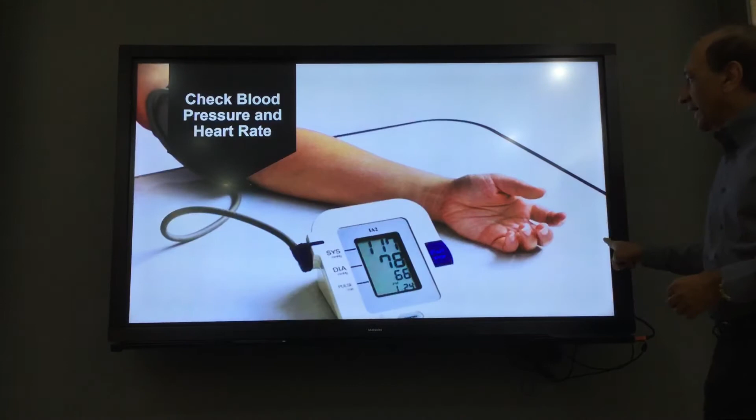So same thing is with structures. Structures also have a heartbeat. And if we know how to look at that heartbeat, and we know what is a good heartbeat and how to manage that, then we can understand the dynamics of the structures and also the behavior of the structure. So heartbeat and blood pressure, both are very important.

When you run, you're always tracking over time how your heart is performing, like a time history of your heart performance. So all of that is actually very relevant to structures also. Last time we started the discussion with the tiger. Today we are starting the discussion with the doctors.

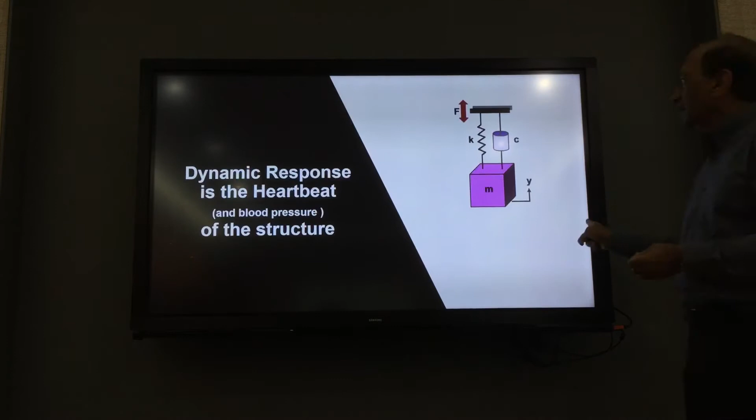But what I'm saying in that video is what we are discussing today - that means the dynamic response of the structures, which is the heartbeat of the structure, especially for earthquake and wind response that we've been talking about so far. So you already know what the system is, you've studied this, right? Okay.

These equations, everybody knows - Newton's second law. Newton already knew that force, mass, and acceleration are related. If there's an acceleration and a mass, there's going to be force. But Newton's assumption is that the body is rigid and has no damping, it cannot deform. But in our case, we are talking about structures.

Structures also deform, and they also have energy dissipation. They dissipate energy when you try to change their state. So those two components are missing in Newton's equation.

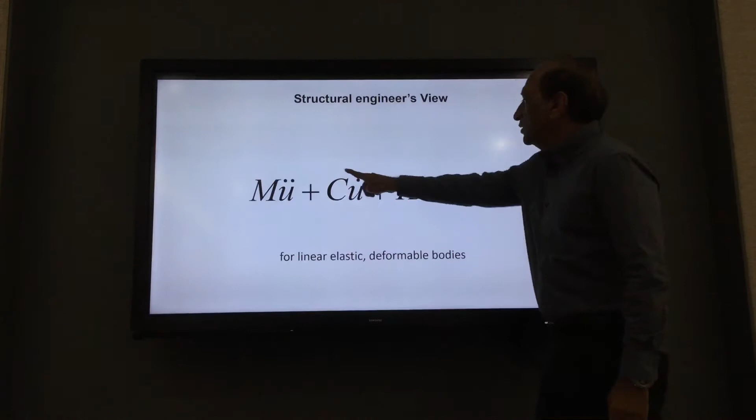Structural engineer's view is this: there are three components to the force you want to apply. One part is taken up by stiffness and displacement, one part by velocity and damping, and one part by acceleration and mass - that's Newton's part. These two additional parts handle deformable bodies that also dissipate or absorb energy.

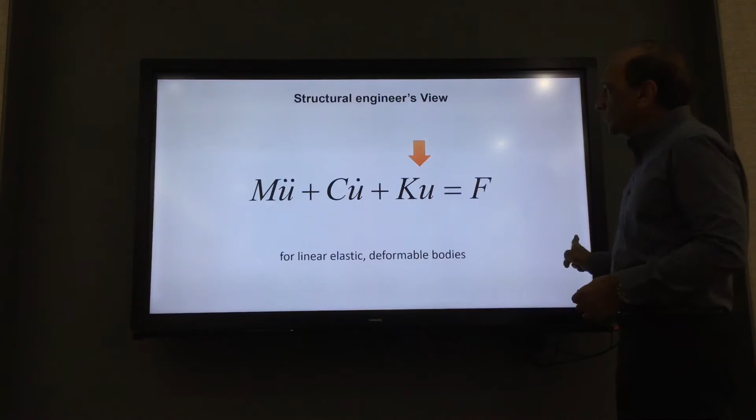But this is still for linear elastic deformable bodies. It is still not a real structure, because real structures are more than this. We are missing one more term we'll talk about. We discussed this a little in the last course, and I want to connect today's discussion to it - this is the stiffness part, and last time we talked a lot about stiffness.

You've seen this one, right? Last time we showed that dynamic response is a sum of the response from the modal response. We talked about the importance of modes already, so we know that.

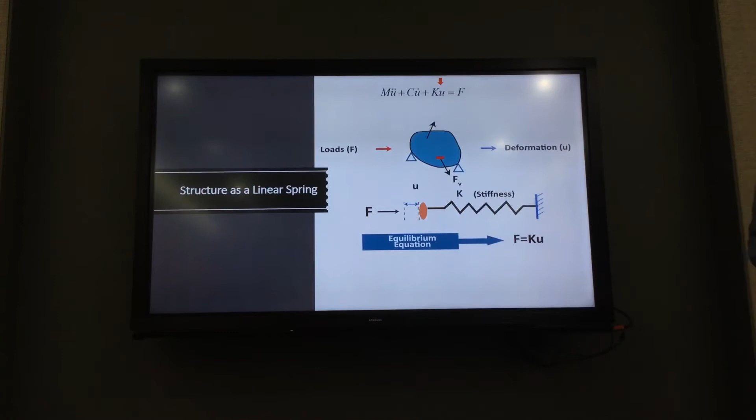We already talked about this equation too: we can consider the structure to be a big spring, so stiffness is here. For static structures, we only have this equation. For Newton, we have mass and acceleration equal to force. For our structures, if we ignore dynamics, the equation becomes simple like that. But when we have dynamics, we have the full equation.

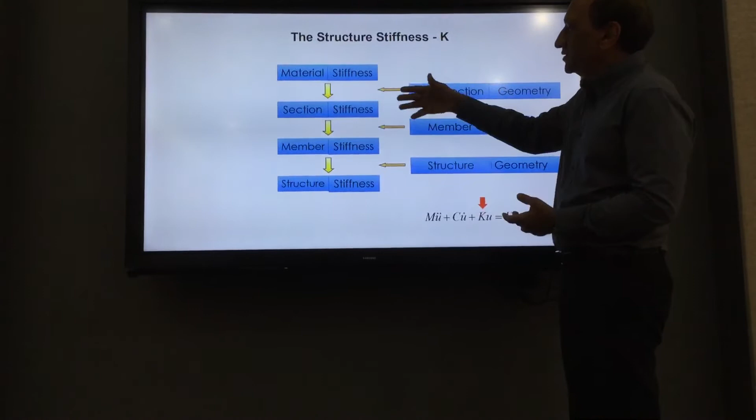We talked about the structure stiffness matrix last time. I just want to remind you that stiffness comes from many components: material stiffness, section stiffness, member stiffness, structure stiffness. Cross-section geometry, material response, member geometry, and structure geometry all contribute to stiffness. Each of these has a linear part and a nonlinear part, because they are not linear only, as we've been assuming so far. Material can be linear or nonlinear, cross-section can be linear or nonlinear, members can become linear or nonlinear, structure can be linear or nonlinear.

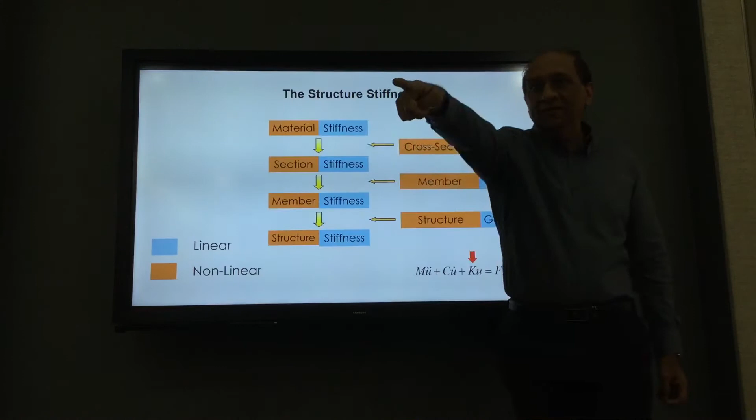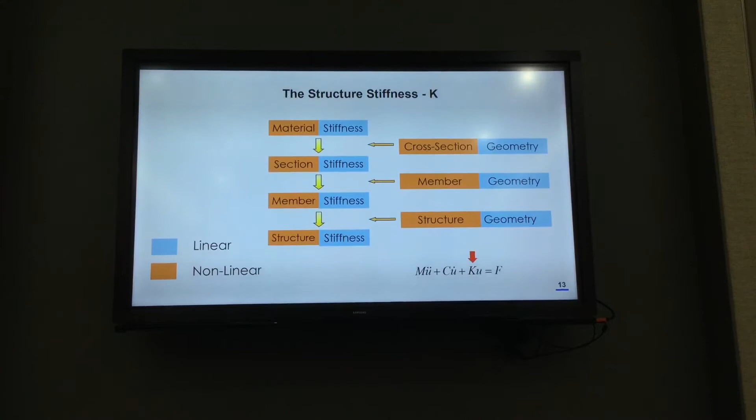Cross-section, okay. What does it mean when I say cross-section nonlinear? Give me an example of a nonlinear cross-section. Cross-section, not material - and we already said rubber is nonlinear. Were you not listening? Nonlinear cross-section.

RC, reinforced concrete, because it's cracking when you load it - the section properties are changing. You people don't remember I spent so much time on these properties of cracked cross-sections. Reinforced concrete is a nonlinear cross-section - a reinforced column, reinforced section, slab, or beam. Nonlinear member.

How do you define a nonlinear member? What is member nonlinearity? We talked about it a lot. Okay, skip, next one, I don't have the whole day for you. Maybe a member that already yielded - not really, because that's a starting case. Okay, I'd say 50-50.

Next one, still nonlinear member - what does it mean, nonlinear member? No, that's correct cross-section nonlinearity. Nonlinear member, any component. Beam with a hinge, no. Buckling and P-delta.

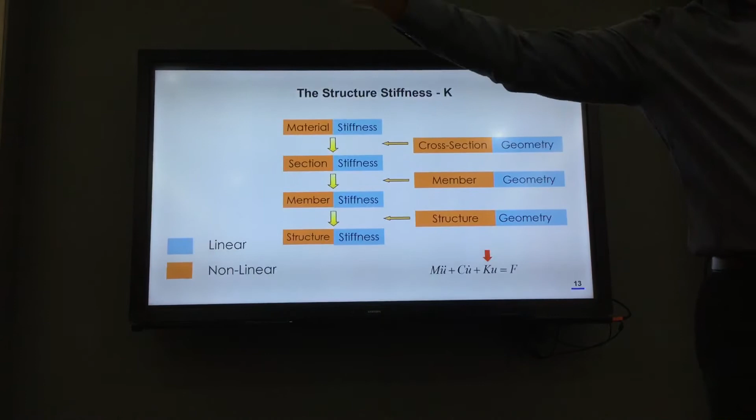Buckling and P-delta is the most important, as we talked about with this column - slenderness. As I explained, this is cross-section nonlinearity, this is material nonlinearity, and buckling and P-delta is member nonlinearity. Structure nonlinearity.

RC structure. Now give me a real example where structure becomes nonlinear. Okay, last one.

Steel structures, everything becomes nonlinear because it's a sum of all of that, but I'm talking about a structure becoming nonlinear because some members become ineffective in some load cases and some members become effective in other load cases. For example, if you have yielding of the cross sections or buckling of a member, some members will become ineffective in the structure. The most common example is a frame with two diagonal bracing wires.

So if you push it in one direction, one member will be in compression, the second one will be in tension. The compression member will simply become ineffective because a wire cannot take compression. But if you go the other way, one wire will take the tension, the other will take no forces. So this kind of thing.

So please open up your mind. I'm quite surprised that basic, simple questions most of you could not answer today. Then you say our grades are not good in exams. You cannot complain. We have studied this so much, and these are very basic, simple things for engineers to determine.

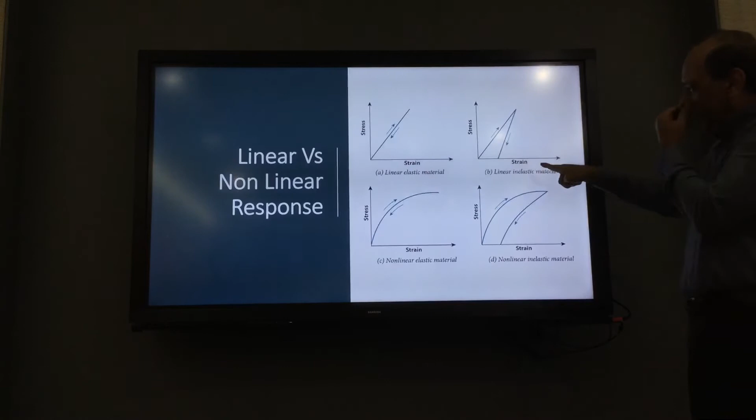Anyway, this is the example of nonlinearity. I've already shown you this last class, in the book also. So linear elastic—I don't want to ask the question again, give me an example because we did that last time: linear elastic, linear inelastic, nonlinear elastic, and nonlinear inelastic material.

Which is concrete? Concrete—nonlinear inelastic. Okay, you had a good chance.

The second one: dynamic equilibrium. So we talked about dynamics. This is the total equation of structural equilibrium. I think I've shown this before. So now we have a complete equation, with nonlinearity coming into the equation.

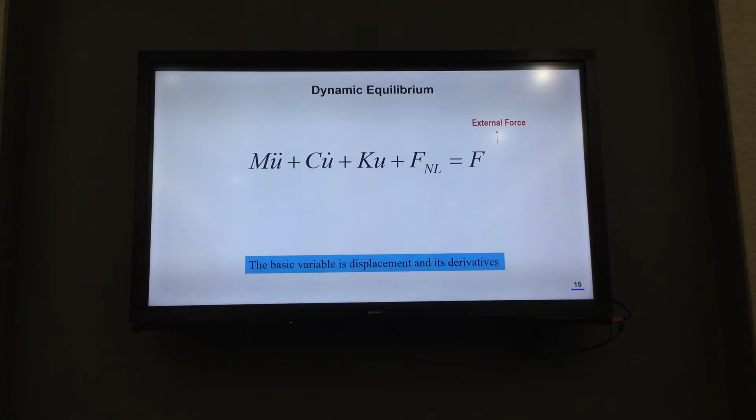So the total equation is now: external force. If you apply external force, it is now taken up by 4 components, not 1. Newton thought only 1. Linear structures think also only 1. Linear dynamics thinks 3, but the total structure has 4 components. So external force is taken up by mass times acceleration according to Newton, by damping and velocity according to energy dissipation, and by stiffness and displacement because the structure is displacing, plus nonlinearity.

That means it is becoming nonlinear. Some force is being lost in nonlinearity. So you might be questioning, how is this nonlinearity a force correction?

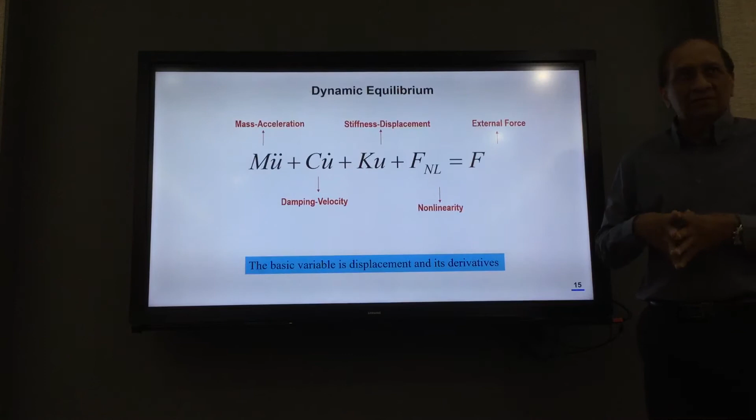Please—I'm sure you also forgot, so if I show you this slide it doesn't matter. But if I show you, this nonlinearity is also composed of a complete set of linear equations. So it is nonlinear because this nonlinearity itself depends on all of that. There's an equation inside the equation, and another equation inside that equation. That's why it becomes nonlinear, right?

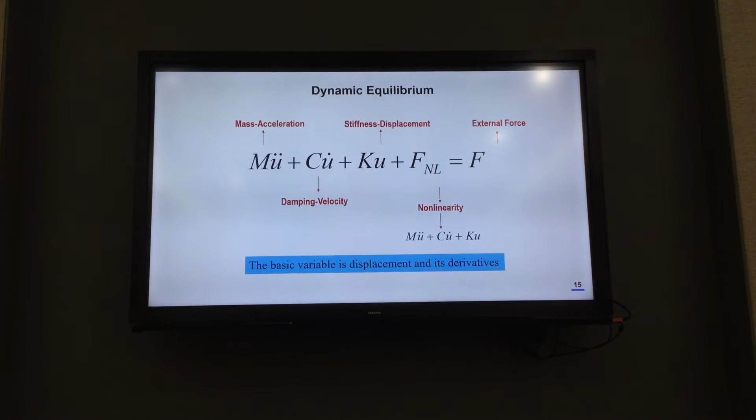So nonlinearity is iterative. You cannot solve this equation, even if you want to, because the equation's answer is inside the equation itself. That's why nonlinear problems cannot be solved directly. How do you solve nonlinear problems? Iteration, hit and trial, finding the solution in the dark. So that is the nonlinearity correction.

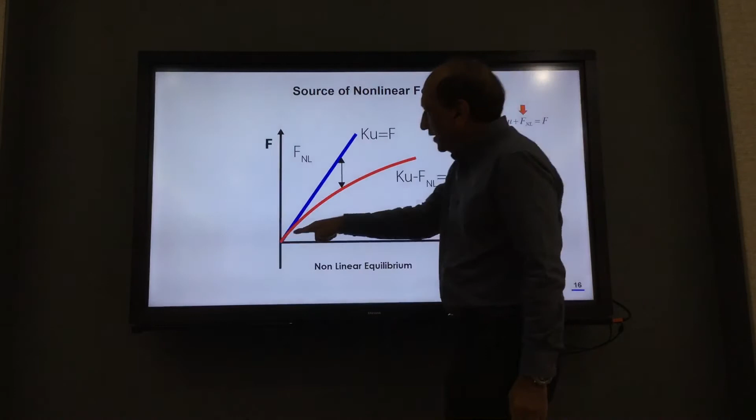We try to keep two lines in focus, so we don't try to find this line directly. We apply a little bit of load, and if it is away from linear, we find that nonlinear correction factor by iteration, by a small margin. Then we put that point, and next time take the previous point.

There are many techniques used to try to find this red line. Please remember, sometimes we can never find the red line. That's why sometimes the nonlinear analysis takes 1 week or 2 weeks on a very fast computer, and in the end it says, I'm sorry, I didn't find the red line. It does not converge, does not give you the nonlinear response.

This has happened to us in some projects. After running the program for 27 days, we could not find the red line, or we could not converge in that project, because the nonlinearity was so complex that the program could not find it. So many nonlinearities, or something like that.

Sometimes, funny thing is, a completely linear structure also does not converge, because there is no nonlinearity. The program is trying to find a red line, but actually the red line and the blue line are the same, so it also fails. So it's not easy to determine the nonlinear response.

That's why it is so complicated, so difficult, so time consuming. And that is your main job, to learn how to find the nonlinear response.

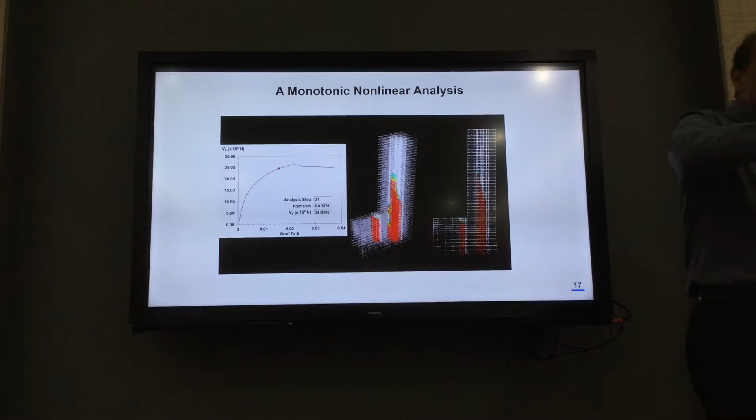This is one example where the nonlinear response is found by the program, and you can see it going up a little bit, and also calculating where the damage is. So that's the nonlinearity at each location, more or less. As we go along, the nonlinearity is spreading, the damage is spreading, and the program is able to trace that nonlinearity step by step, and that's where it is.

You can see now this is the structure deformation, load, and nonlinearity being calculated step by step. Step number 50—it took the program 50 steps in this case just to find that nonlinear curve. At each point it is iterating and finding that, and the corresponding damage state. These different colors show how much damage or cracking has occurred in each of those components in the structure, how much cracking, how much yielding is occurring, and the structure is becoming nonlinear.

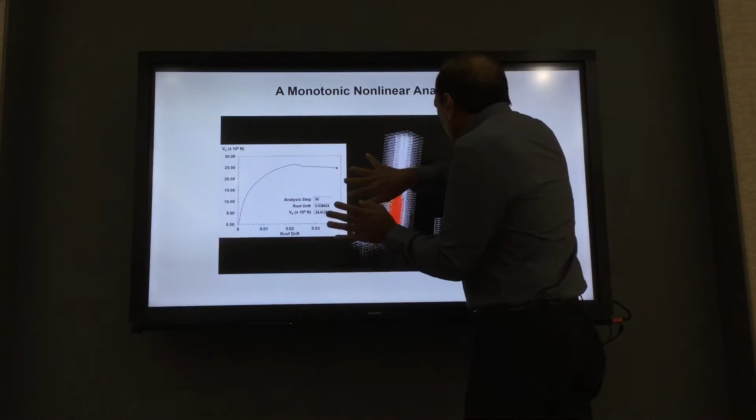This is the most common thing you people will be doing in your thesis and in our office. We always try to find the nonlinear response of the structures to lateral loads. We push the structure, and then we say, let's find out the nonlinear response. That's why if it's linear, it will go forever.

But here we can see that it starts to deform and then becomes very flat. Stiffness becomes zero, and then we stop. After some time, actually it will go down and fail. That is the job—for earthquake, we always expect the structure to become nonlinear, and we need to find this nonlinear response either by estimation or by real analysis.

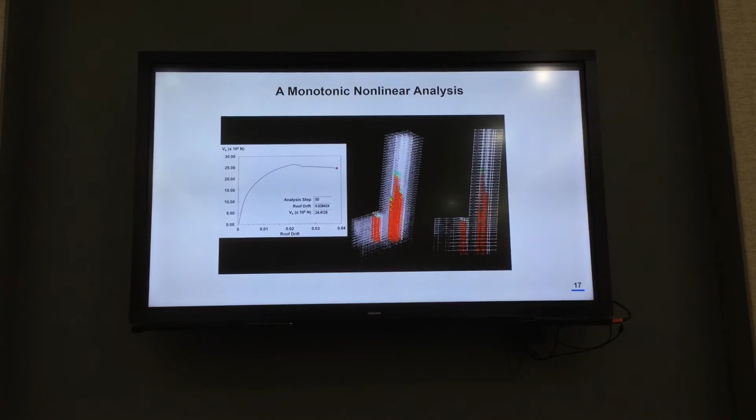Almost all theses done with me and Professor Pennung generally are doing this, using a program called Perform 3D, which is this program, right? Not ETABS, not SAP. We are performance-based design, and it all depends on this one. We'll talk about that again.

Just to give you an idea, lateral response becomes nonlinear, especially under earthquake. Even large winds can make the structure nonlinear.

So coming back to the big dynamic equation, where we have everything—this equation is a very nice equation which has every response built into it. If you look closely, you can find many things from this equation.

For example, if you assume that damping is 0 and there is no external force, no nonlinearity, you get the free vibration equation. You know what that is. You get natural frequencies, you get mode shapes, you get the natural period. From there you can determine the free vibration of the structure, and I'm sure you have studied quite a bit about that.

So we get natural frequencies and mode shapes, and these are critical for lateral response. The entire lateral response of the structure, no matter what type of structure it is, depends on the natural frequencies and mode shapes, because the total response is the sum of the natural period responses. So if you want to determine response to wind or earthquake, you must know the modal response or the natural frequencies—that is very critical.

So modal analysis, please remind me, have we talked about this already?

Okay, so this is the heartbeat that we were talking about. If you are a structural engineer and you want to understand the structure, you must listen to the heartbeat of the structure. And that heartbeat is natural frequency. Just like our heart, tick, tick, tick. Whether we're sleeping, whether we're working, whatever we're doing, the heart is beating. It never stops. When it stops, that's the end.

So as long as we are alive, it never stops. Same is the case with structures. Structures are always vibrating. They never stop to vibrate, whether there is a load or no load. Without external load, without damping, without anything, they are always vibrating. The vibration we can measure, they are vibrating enough for us to measure that vibration.

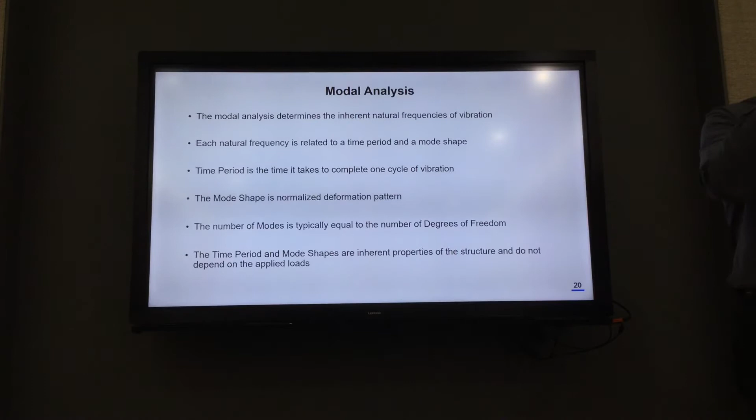If you watch closely, tall buildings with a very clear eye, you can actually see the vibration by camera. If you capture the video high speed enough and detailed enough, you can actually see tall buildings vibrating in natural modes. And then you can measure those vibrations. But measuring is one thing, calculating is another.

So we can do the calculation, we can do the measurement. Most important thing is that this determines the inherent frequencies of vibration. Each natural frequency is related to a period and a shape. So each unique frequency, natural period, has a time to oscillate and a shape to oscillate.

Both of this is critical for us to see how this is happening, because we are going to study that for all of the other response for the lateral loads. The time period is the time it takes to complete one cycle. The mode shape is the deformation pattern.

Remember, mode shape is not real, it's not a real number. You need to relate it to some loading to find the real numbers. So mode shape is only giving you a relative deformation pattern, and it can be scaled to some real deformations.

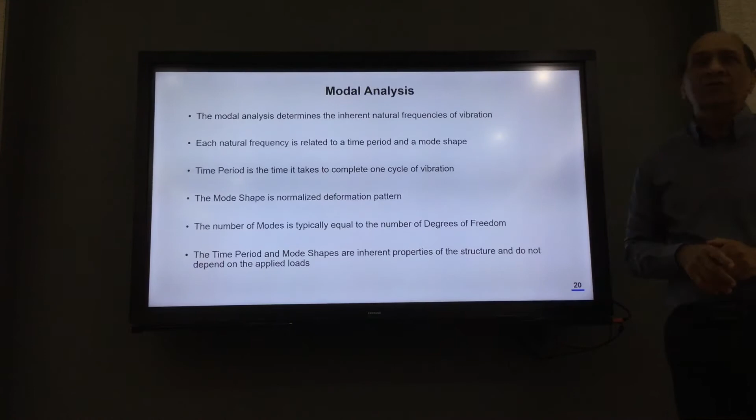The number of modes is typically equal to the number of degrees of freedom in a structure. So in a tall building model like that you're making, how many degrees of freedom do you think there will be? Well, not infinity in your model - in reality, infinity, but in your model, how many? Guess. How many? Depends on the nodes. I know, but just guess. For your 40-story building, how many?

Easily 500,000 or 1,000,000 degrees of freedom in your model will be there, right? So we are talking about 1,000,000 natural frequencies of a model that you are going to create easily.

But not all of them are interesting. Not all of the natural periods are interesting or even possible, right? Some are of such high frequency and the stiffness is so large that it will be very difficult to excite them. So not all natural modes can be excited. Only a few can be excited, and those are called the significant natural modes.

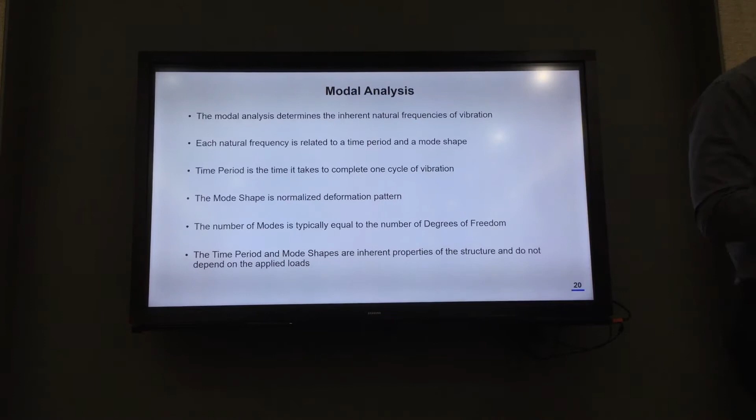And we are always trying to find the significant natural modes of a structure. We should know how to extract modes, how to look for modes, what frequency range we're looking for, what modes we're looking for, how many, and where. This is the most important understanding of a structure. If you don't know how to do that, you cannot be a good structural engineer.

I'm sorry to say that, but you can write it down and put it in your pocket. So if you want to be a good structural engineer, you need to be able to understand dynamics. You need to be able to understand modal response. You need to be able to understand how many modes are important, where to look for, how to get them, and all that stuff.

For example, if you're looking at a tall building and you're interested in wind, you have to look for certain modes and certain frequencies. If you're looking for earthquake, you have to look for certain modes and certain frequencies. If you're looking at people walking on the slab, you have to look for certain modes and certain frequencies. All three could be different. So for all three different purposes, you may be looking at different modal properties. Not the same modes will give you the three important pieces of information.

And that is where understanding of the modal response is critical. For example, if you're looking at the modes for walking on the slab, dancing on the slab, or jumping on the slab, you need to look at the local modes of that slab in that range of frequency we are interested in. For earthquake, we want modes, maybe first 30 modes with mass participation. For wind, we may be interested in first 3 or 6 modes. Depends on what we are looking for. So we must know what we are looking for and what modes are relevant to that. You cannot look for all the modes. It's pointless, right? 500,000 modes is useless.

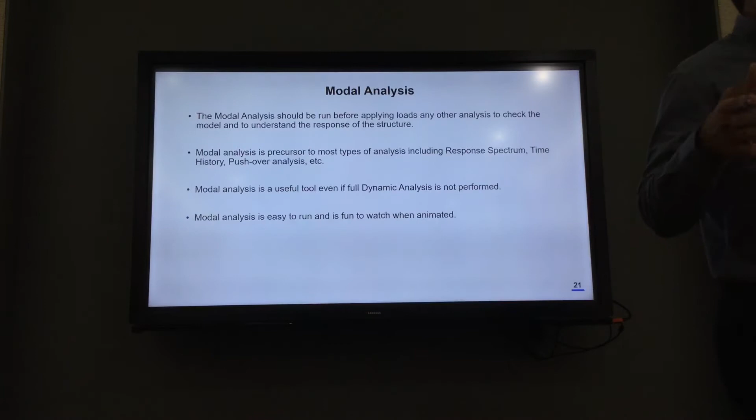Modal analysis should be done before applying any load. So when you do your project, you finish your model, the first thing I'd like you to do...

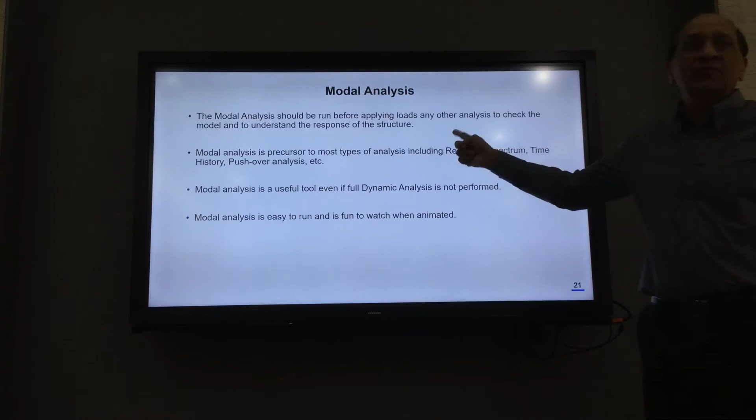So the first thing you should look at is the natural periods and mode shapes, and try to understand them. At least you should look at 12 modes, first 12 modes minimum for a tall building. So this modal analysis should be done even before you apply dead load or anything, because it will tell you whether your model is correct or not.

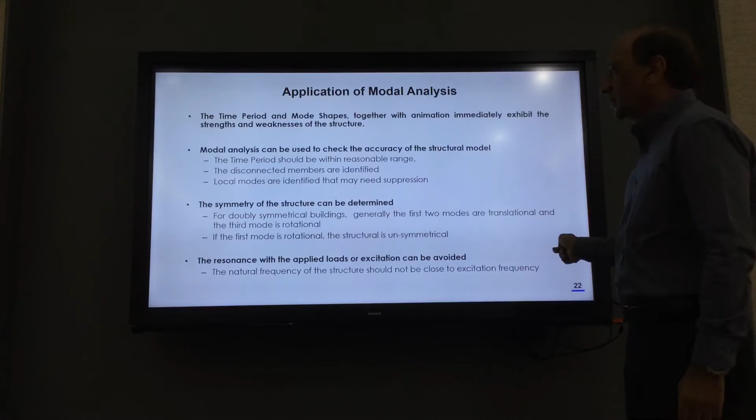This is an example of the modal analysis, and you can see from here that when you look at the modes, you can see whether the structure is symmetrical or unsymmetrical, because if it is unsymmetrical, you will see torsion in the building right in the first or second mode. If it is symmetrical, the torsion should be the third mode, and the first two modes should be just swaying in one weak direction, then the second weak direction, then torsion.

That's how a typical symmetrical building should look like. But sometimes completely symmetrical buildings have the first mode as torsion, which surprises and shocks some engineers. How can it be? Because according to what is normally written about modal analysis, if the structure is symmetrical, the first mode should be translation, second mode should be translation, third should be torsion. But if the structure is completely symmetrical, sometimes in tall buildings especially, you get first mode as torsion. Can anyone tell me when that can happen and why?

Stiffness? Yes, but can somebody think further? This is really a good question for you to think about. If you can come up with an answer, I will get you chocolates, promised, next time. Anyone? In what case can you get a symmetrical tall building to have torsion in first mode? I should ask that in the final exam.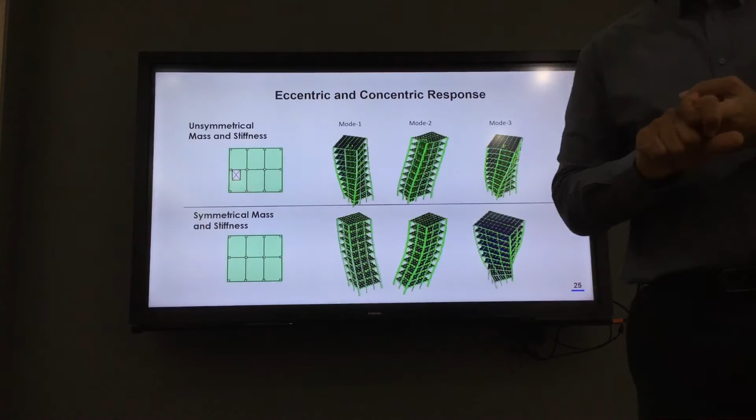Do not talk about loading. If you talk about loading and modal together, that's a major misunderstanding. It cannot be. Relative stiffness of beam and column? You are trying to go in the right direction, but not there yet. One more step, maybe half a piece of chocolate. Okay, I will come back to it in a minute. Think about it if you can find it, otherwise I will show you. I think it's stiffness, like beam to column relation. Yeah, but not really, maybe 20%.

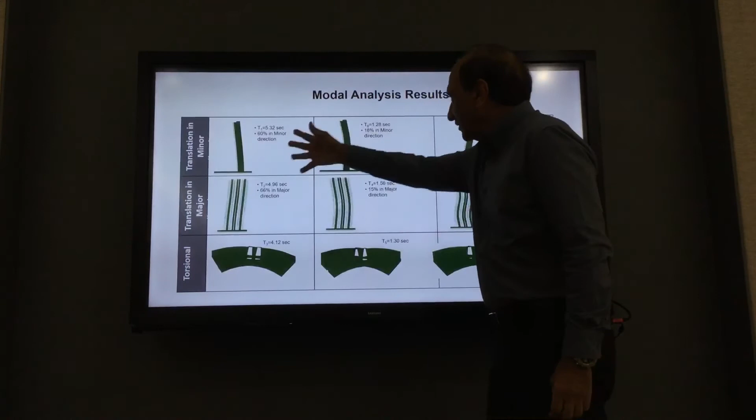Correct. Okay, this is the modal analysis, this is how you should look at your modes. When you make the report for your project, I expect every group to have this kind of figure in their report and presentation, showing the 9 modes of the building. They are arranged in a certain pattern, which is very important to understand, how we arrange them and how we look at them. So this way and this way, we are looking at different things, it's not randomly arranged. These are the first 9 modes, but arranged this way you can see T1, T6, T9, T1, T2, T3, so there's a certain order to this.

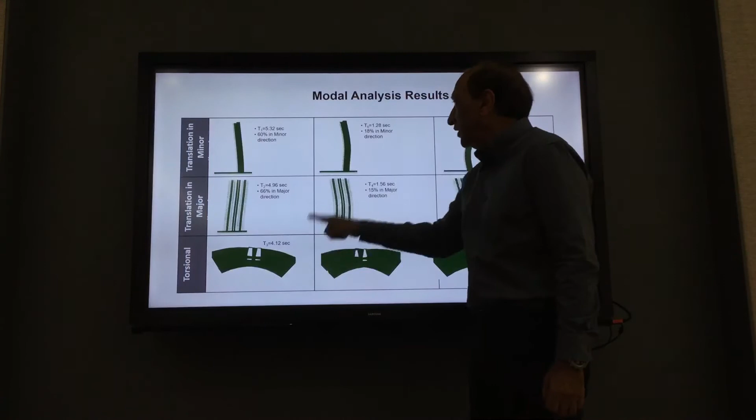There's a certain change in the natural period: T1 is 5 seconds, T6 is 1.28 seconds, T9 is 0.7 seconds. But all of them are modes in only one direction - first, second, and third mode in that direction, first, second, and third mode in the other direction, first, second, and third torsional modes. This is the natural frequency in this direction, first, second, third mode. But the program will give you modes like 1, 2, 3, 4, 5, 6, 7, 8, 9. You are not going to look at them that way. You need to understand the directions and separate them into modes in a particular direction, in a particular order.

Right? So, the ordering is not clear. That's good, I don't want to make it clear, I want you to think about it. I just take this picture and think how you're going to arrange that. Please do some work at your end, right? I'm giving you a sample, I want you to come up with this. That is the project - if I explain, then what's the point? So get something like this. But remember this one, this one, this one, this one.

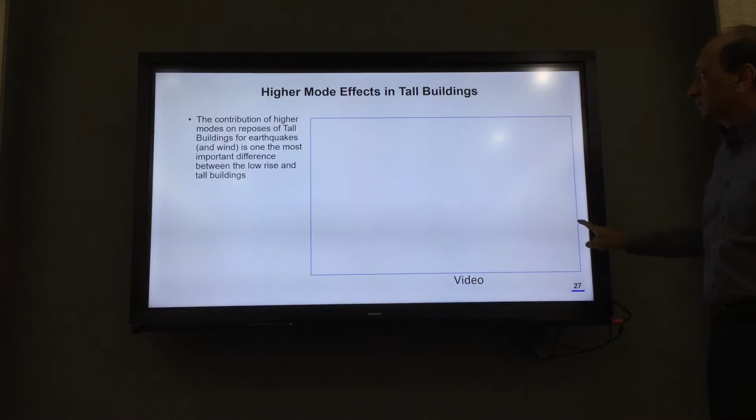We have already discussed higher mode effects. Do I have a video? This I've shown you already, right? Similar, but not this one. Okay, this video is showing you - actually we made this video as fun, it's also available on the internet. Originally we thought we would get performers to perform a dance based on these modes, but then we dropped the idea, so we just made a video. Please look at the videos, the mode shapes of the tall building and the direction.

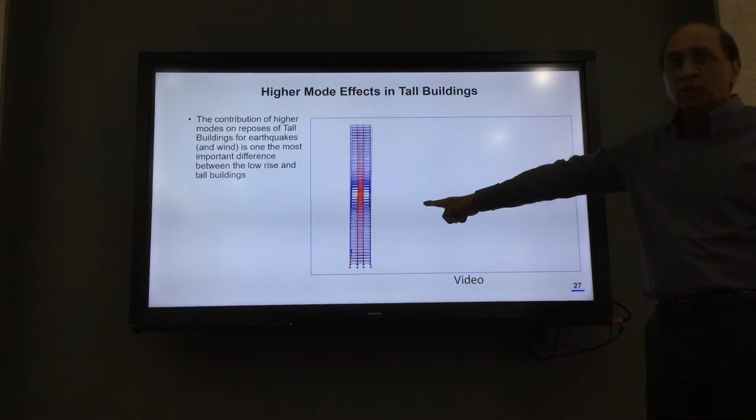Which mode is this? First. Okay.

Exactly. You should see and immediately know what mode is that from the shape. So this is the first three modes in weak direction, and you can see how the other direction has its first mode, second mode, third mode - really nice looking dancing buildings. By looking at these mode shapes, you should be able to understand a lot. For tall buildings, these higher modes are very important. For short buildings, first modes are very important.

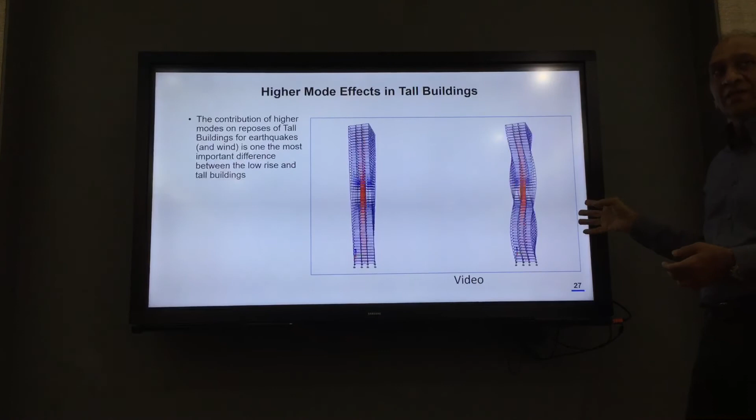For tall buildings, we must be aware that higher modes - second, third, and sometimes even fourth and fifth modes in each direction - are important. What I'm showing you is 9 modes: first 3 modes in each direction. So 3 directions means 9 modes. Minimum 9 or 12 modes should be looked at in a tall building.

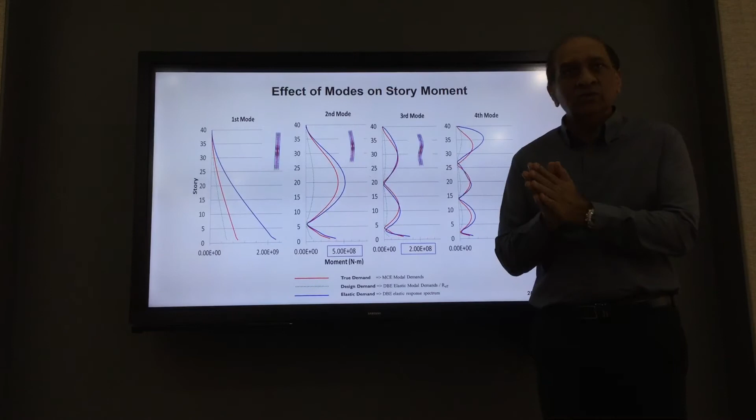This is the effect of those modes. This is a little bit advanced, but I think you're ready for some advanced information, especially related to earthquake and wind, since we're talking about lateral load analysis. Understanding that the tall building's response to these loads is dependent on the mode is very important. And this is knowledge that 90% of engineers lack. As I told you in Cebu, when I asked this question to professional engineers doing design for many years, they also did not have an understanding of the effect of modes on response, because nobody teaches this stuff in undergraduate.

Forget about the red and different colors - I'll talk about that later, that's another question I don't want to get into right now. Just look at the blue line for now, don't look at the other lines, it will confuse you. This is the bending moment pattern from the first mode. This is the bending moment pattern from the second mode. And this is the bending moment pattern from the third and fourth mode.

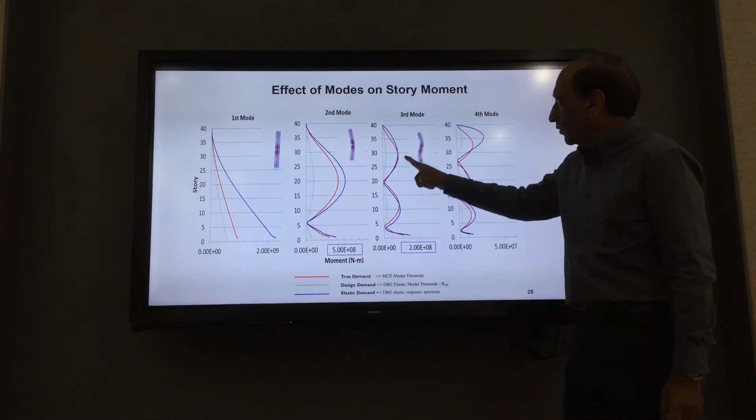You can see that the bending moment developed at various floors along the height varies a lot depending upon which mode is predominant. If it's only the first mode, that's the typical bending moment pattern which starts from the top and is maximum at the base - that's how we think buildings should have moment, zero at the top and maximum at the base. That's what we think. But actually in the second mode, the maximum moment occurs at the 20th floor, not at the base. In another mode, it may occur at the 30th floor, or 10th floor, and so on, and here in the 4th mode, at the 34th, 35th floor. So the higher modes produce response in buildings at different locations.

Higher the building, higher the effect of the higher modes. For a small building, 5-10 stories, this may not be important. But for taller buildings, the response contributed by higher modes is very important. So for now, just remember that.

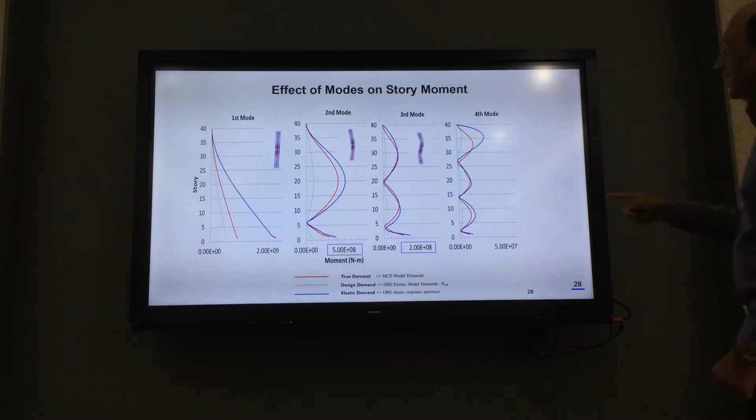But if you look at the numbers, actually this is not such a big difference, because this is 10 raised to power 9, and this is 10 raised to power 8 - so actually it is small. Even though the figure looks big, the actual number is quite small. For moment, the effect of the higher mode is not that significant, because higher mode moment is small compared to first mode moment, even though the pattern is different.

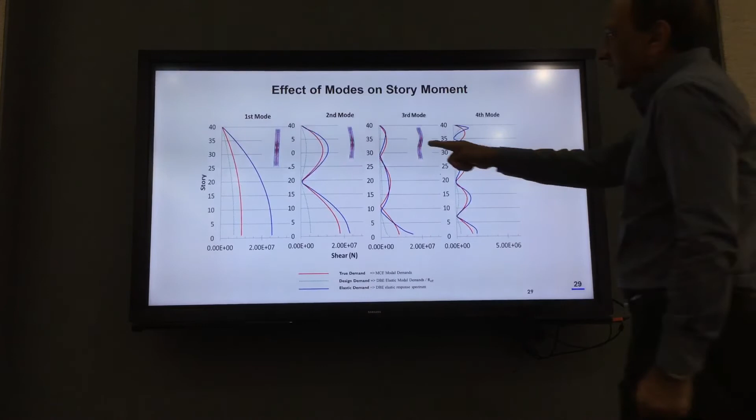But not so for shear. This is the shear generated by earthquake from different modes. Again, you can see the pattern of the shear is like this, not like that - it becomes nearly flat at the bottom, even for the first mode. Higher mode shear looks like this, but the scale is the same, 10 raised to power 7. So this number here and this number here are of the same scale. In fact, for the second mode here, at the 30th floor, higher mode shear will be larger than first mode shear in real numbers also. So shear is more heavily affected by higher modes than bending moment.

This is a very important lesson for tall buildings, especially for earthquakes. For earthquakes, the higher modes produce a lot of shear in the building, comparable to first mode shear. For bending moment, the first mode moment is larger, even though higher mode moments are generated at different locations, but it may not change the results so much - though it may change in some locations. This is a very important observation related to lateral response and modes.

Wind is predominantly first mode behavior. An earthquake moment is first mode, shear is higher mode. So when you combine wind and earthquake, or when you want to design for wind and earthquake, it becomes complicated, because then you cannot simply compare wind and earthquake unless you know the modal contributions from higher modes also in the two. This creates the start of the problems between these two forces, earthquake and wind.

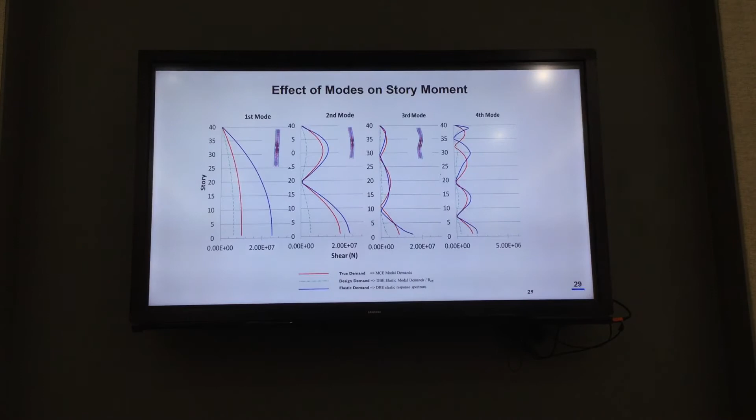In general, when we design buildings, in many cases the bending moment is governed by wind, shear is governed by earthquake. The reason is higher modes for wind do not add. Wind is almost all first mode, both shear and moment. Earthquake shear comes from first mode as well as higher modes, so the earthquake response is governed by higher modes. Even though earthquake may be small compared to wind in first mode, it will be higher than wind in higher modes, so total response may be higher. This is an important observation that you should remember. It will affect many things later when we talk about performance-based design. Then I will talk about these different colors.

Another important thing to remember: you know the response spectrum curve already. The shape of the response spectrum curve and the natural period are very important, very critical, and higher modes are very critical. Please spend some time looking at this shape.

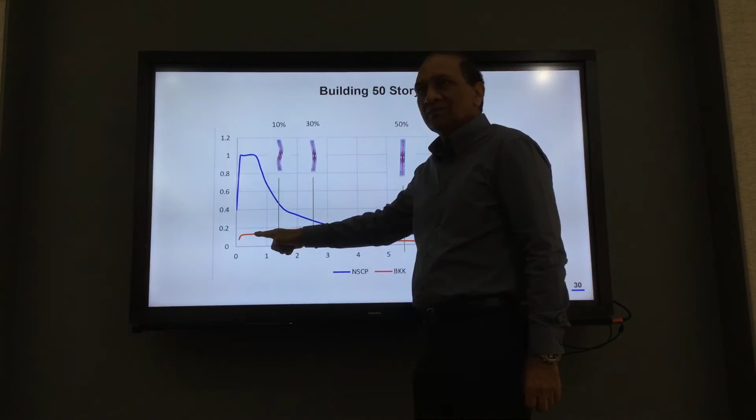This is the response spectrum curve from Philippines. This is the response spectrum curve from Bangkok. Two different cities, plotted on the same scale. So what do you see here? Very different shape. For Manila, the response of buildings with small natural period is very large compared to Bangkok. And in this range, the Bangkok spectrum goes up and then goes down, whereas the Manila spectrum simply goes down.

You might be thinking, what's the big deal? It's a big deal because for Bangkok, the peak of the response is at 2 seconds, roughly. For Manila, the peak of the response is at 0.1 second. At 2 seconds, this response is about 25%, only about a third of the response at 0.1 second. In the Bangkok case, the response at 2 seconds is actually nearly 50% more than the response at 0.1 second.

So why is this information important for us? I'm asking you, you're all looking at me. It is important because the earthquake forces are generated from this number, which is the acceleration component. Force F is equal to ma, I told you. So that is the acceleration on that side, correct? So force will be generated based on that acceleration produced for that natural period.

So what this graph, the response spectrum, is saying is that if your natural period is 0.1 second here and you are in Manila, you will get acceleration equal to 1g. So your lateral force will be equal to your dead weight. If your lateral force is 10, your gravity load mass is 10 ton, horizontal force due to earthquake will also be 10 ton. That's what the response spectrum is saying.

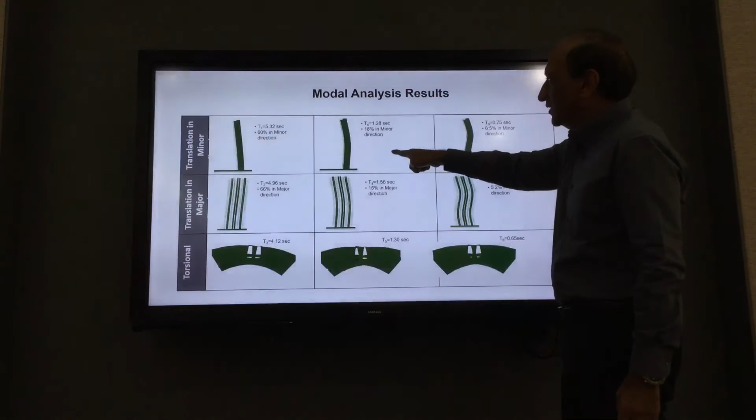Same building, if you go back to my diagram, that's why I asked you to study this. This is the first mode, natural period 5 seconds. Second mode, in that direction, natural period 1.28 seconds. And third mode, 0.7 seconds.

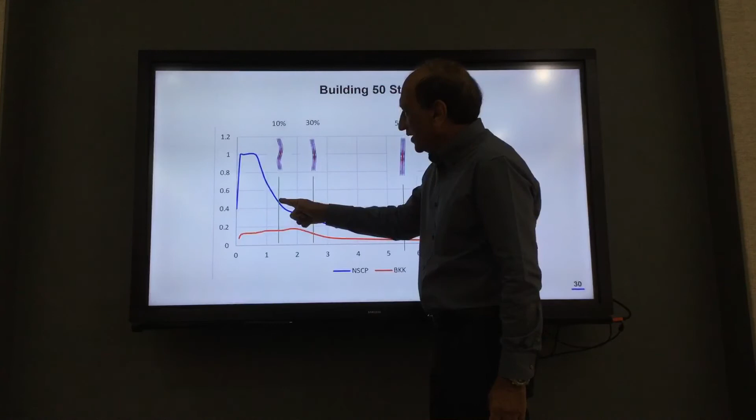So if you plot this on that curve, you get the first, second, third mode of the building in that direction. The third mode has gone to this point now, so it will contribute a lot of shear because it is on the high end of the spectrum. And higher modes, another fourth mode, will be here.

The only difference is that less mass participates in those modes. More mass will be participating here, because when the entire building sways this way, almost the entire building mass, or 60% of the mass, is involved.

So mass and acceleration give you force. Here the mass participation will be large, even though acceleration is small, so you get a lot of force. Here the mass participation will reduce, but the acceleration coefficient will increase, so you still get a lot of force.

This gives us two very important things. We have to look at the mass participation in each mode, and also the natural period of that mode, and look at the response spectrum. Then we will understand what the total response of a tall building to earthquake will be, for example. So this understanding is critical.

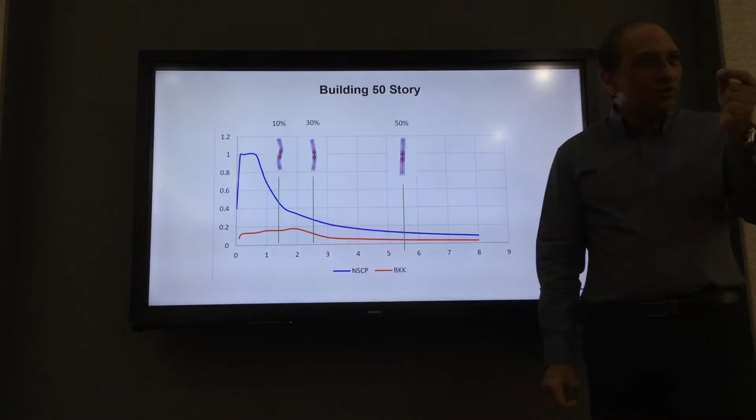Then you can design the building to your wishes. You want to reduce the earthquake force, you know what to do: increase the natural period, move it away from the peak, so you go down on the spectrum. Or you reduce the mass, or you reduce the mass participation ratio of that particular mode.

So there are so many things you can do if you understand this mechanism. You can design your building, fine-tune it to reduce the dynamic force from the elastic spectrum. Second, you can reduce the dynamic force by nonlinear response, which we will talk about later. I'm just talking about the elastic response now. Linear response can be reduced by optimizing the modal response of the building and looking at the response spectrum.

So here in the Bangkok case, we need to stay away from 2 seconds. If the building has a natural period close to 2 seconds, it will attract the highest force for a 20-story building. So we either have to be lower or higher.

So that is quite an interesting observation for Bangkok, that they don't want a building at that period. If a client comes to you and says, I want to make a 20-story building, you could say no, please make it 30 stories, because I will give you smaller force, since at 3 seconds it will drop by half or less than half. So you can say it will actually be more economical to design a 30-story building than a 20-story building. Not really true, but okay.

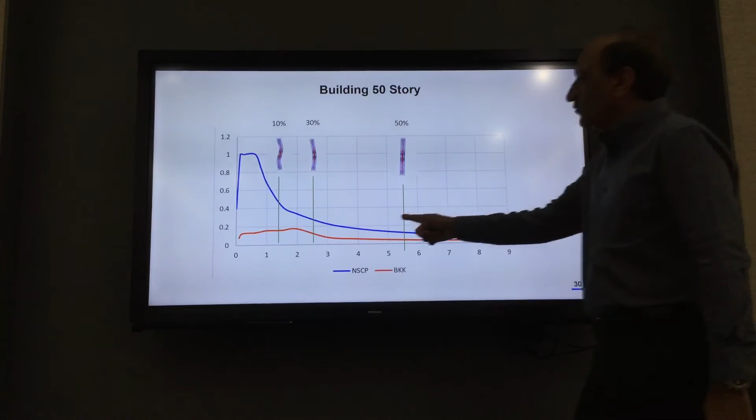So sometimes what we do is, if the building response is 2 seconds, we try to reduce the stiffness, make it soft. So if there's a big shear wall, we say, no, please make the shear wall smaller. We don't want a big shear wall, because a big shear wall means more stiffness and a smaller period.

So in many projects, we have actually done it. We have asked the client to reduce the size of the shear wall, or break the shear wall down into pieces, so that we can increase the natural period and move it away from the peak, and it reduced the forces. So it's quite interesting that you can look at the response spectrum, look at the modal response, and design the building to reduce the forces.

Any questions on this? Everybody clear?

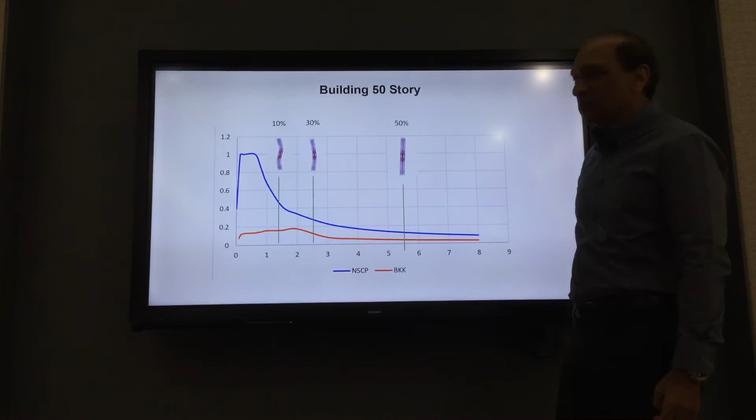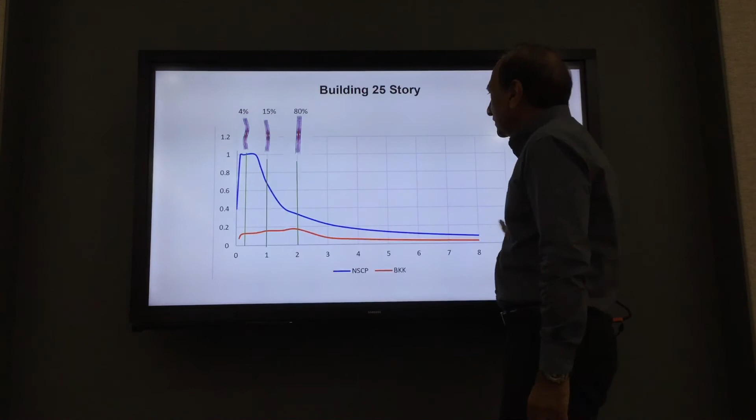So 80% mass multiplied by this gives a very large force. In this case, 50% mass multiplied by that small force, 30% mass by very high acceleration, and 10% mass multiplied by that. This is the mass participation ratio.

So by looking at the natural period, looking at the mass participating in that mode, and looking at the response spectrum curve, you can understand a lot and improve the lateral response of the buildings.

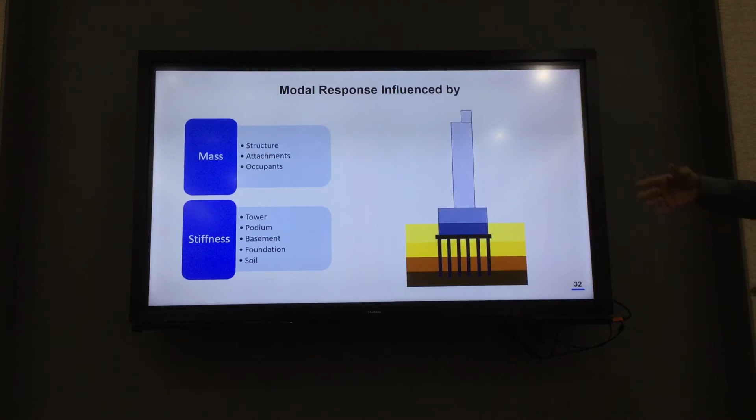The natural period is also affected by other things: mass, structure, attachment, occupants, stiffness of the tower, podium, basement, foundation, and soil. So this is the structure - the total natural response will depend on the stiffness of the tower, the podium, the foundation, and the soil.

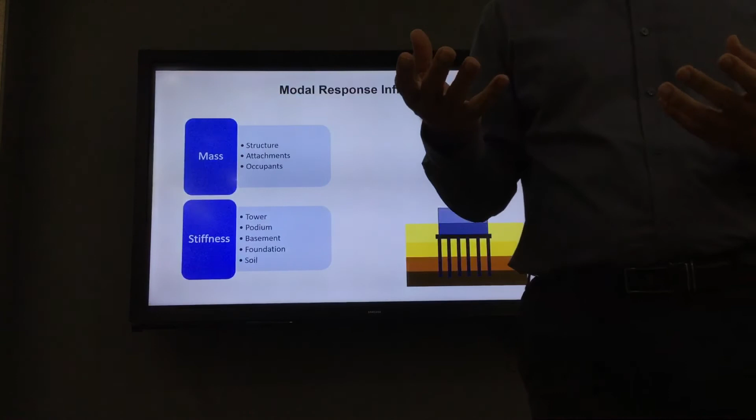So you can play with these things to get what you want from the building. As a designer, we have a lot of innovation we can do. You don't have to just accept the project you get and design it as it is. You actually have a lot of things you can propose, study, and refine to improve the design. That's what makes one designer better than another - because they understand something more than others, and they bring that to the design.

So you already know stiffness is affected by material, cross-section, member, and foundation modeling. So you can spend some time improving that.

So one exercise I want you to do when you finish the model is to change the natural period of the same building to get the minimum base shear, based on what I've just explained to you. One part of your project's outcome should be: what will I do, what will I change in the building, so that I get the least base shear for that building by modifying the natural period?

By looking at the response spectrum of your project, try 3 different things, then you can say: if I change this, I will get this natural period, this mass participation, this total force. When you do that, please note it down - I want this in the report - refining the structure for least base shear from earthquake.

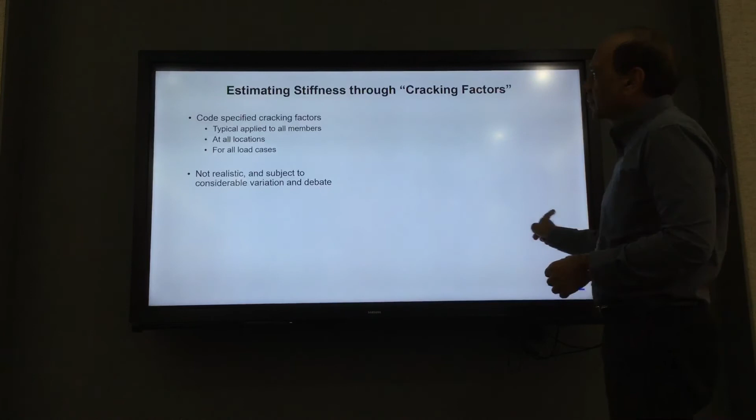Skip this, a bit advanced. So coming back now to the big picture for earthquake response, from this whole thing we talked about - when I talk later about lateral response to earthquake - this is the main equation I've shown you, called the nonlinear dynamic equilibrium equation of structures.

All kinds of response are governed by this equation. There is no structural response outside of this equation. If you can find one, please let me know. Think of some response you think is really weird, and we will see whether it is part of this equation or not. Think of any strange response of a structure you never thought about, and let's see if we can fit it here.

I need three weird responses. For example: traffic on a bridge, or a ship hitting a structure. Think of anything you can imagine a structure might be subjected to, and we'll see whether we can handle it with this equation or not.

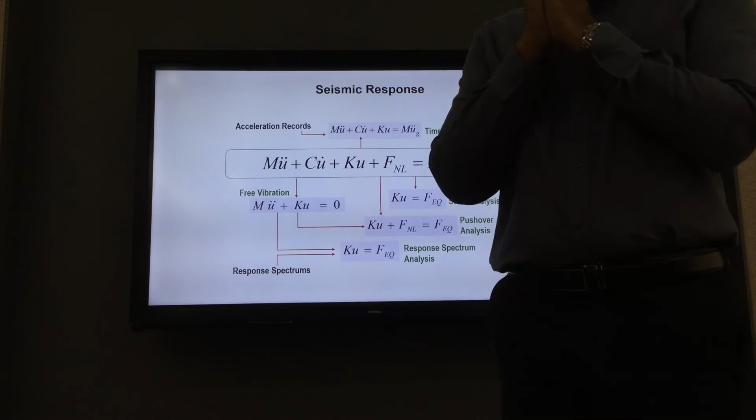Temperature - okay, temperature, good. Temperature is a change - what does temperature do? It causes expansion and contraction of the member, and because of that, force is exerted: compression and tension. Correct, right. So that will be part of the force.

We can convert that into... you are right, she is right in a way. What we need to do in that case is apply this displacement U as a given number rather than calculating it. Normally, for this equation, we know the force and calculate displacement. But in your case, the displacement is known as the expansion from temperature, so we put that known displacement into the equation and find the force required to restrain it with a certain stiffness.

Temperature is not nonlinear, it's linear. Normally the response to temperature is linear. Temperature may change in different ways, but normally when we do structural analysis for temperature, it's a good question, actually very good. She's picked a good example.

When you analyze temperature, what we normally say is I would like to see the response of the structure at the natural temperature, then there is a temperature increase, delta T. It doesn't matter what the real temperature is, it's the delta T we are worried about. So normally when we do temperature analysis of buildings or structures, we specify a delta T, the change of temperature from one time to another.

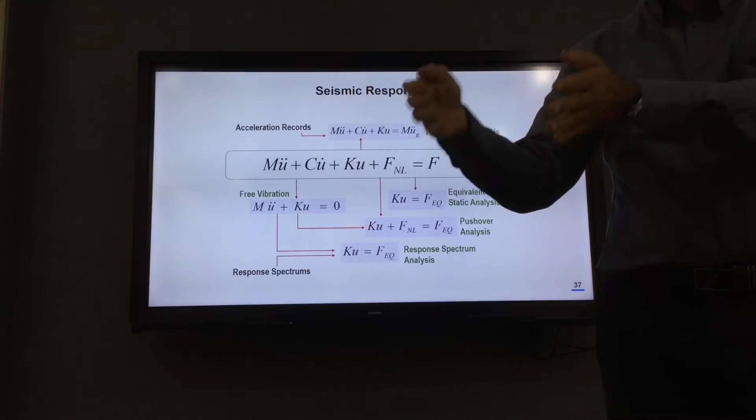But these all come back to the same equation, because we specify the displacement since we know the thermal coefficient. We multiply the thermal coefficient with the temperature gradient delta T to get the strain, the total expansion. Then we put that expansion into the equation, and based on the stiffness we can calculate the forces generated in the structure. You understand my point? Yeah.

So similar questions apply for creep, shrinkage, and temperature - all handled the same way, by assigning a strain change or displacement change in the structure, then calculating the forces based on stiffness, rather than applying forces and calculating displacement. Here the displacement is known in the members, the expansion is known. Good. Any other example?

One more. Any other behavior that you think might not be covered here?

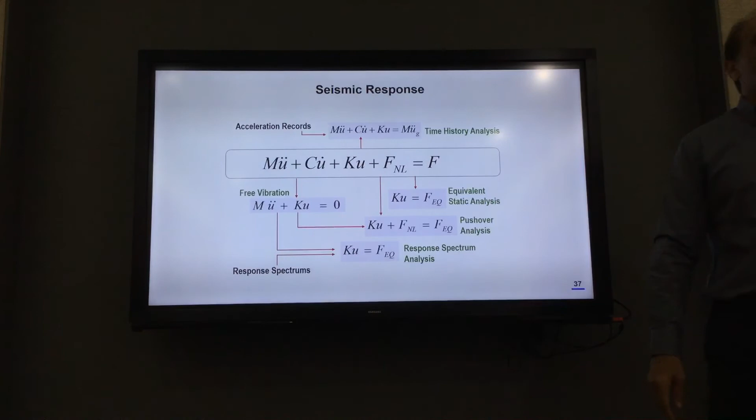Flooding is a force, right? So we can calculate it, relate it with time. Almost every machine vibrating on the floor is a dynamic force. So almost everything you can imagine happening to a structure can be determined by this one equation. For earthquake, we can simplify this equation in many ways.

For example, if you remove these parts and assume the structure is linear, elastic, and static, we can use equivalent static force, which is used by the codes - they give you an equivalent force coming from part of the equation. If you want to do a pushover analysis, you take some part. For free vibration, you take some part. Response spectrum, some part. Linear time history, some part. Non-linear time history, some part. So all types of earthquake analysis are done using the same equation, just considering some parts and ignoring others.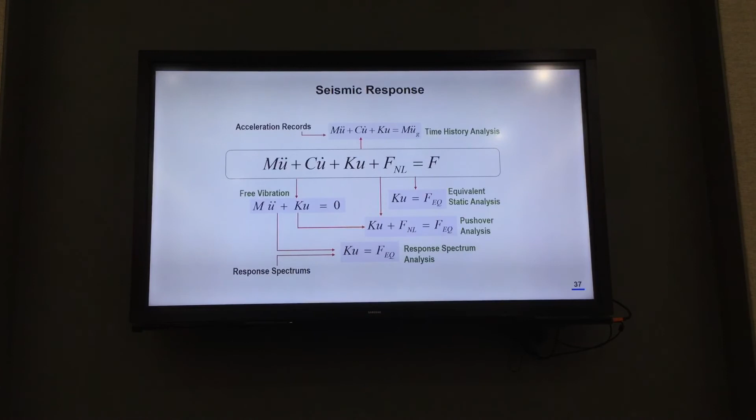But ultimately, what we want to do is use the full equation - that's what performance-based design is. That's what AIT is good at doing, performance-based design, using the full nonlinear equation to solve the response, including all kinds of nonlinearity and dynamics. Construction stage analysis, dead load increase, stability, P-delta effect, whatever you can think of, everything is included in the analysis. That's the complete thing we want to do.

So other analyses - P-delta, buckling, static pushover, fast nonlinear, large displacement - they all come from the same equation. Free vibration, response spectrum, steady state, even wind dynamic analysis can be done by the same equation, because we apply a force changing with time, measured from a wind tunnel or somewhere. So almost every kind of analysis can be done. I can assure you, inside SAP and ETABS, they're just solving this equation in different ways. That's all.

So, analysis procedures - these are the 4 analysis procedures specified in codes and documents that you need to do for your project normally and for your buildings.

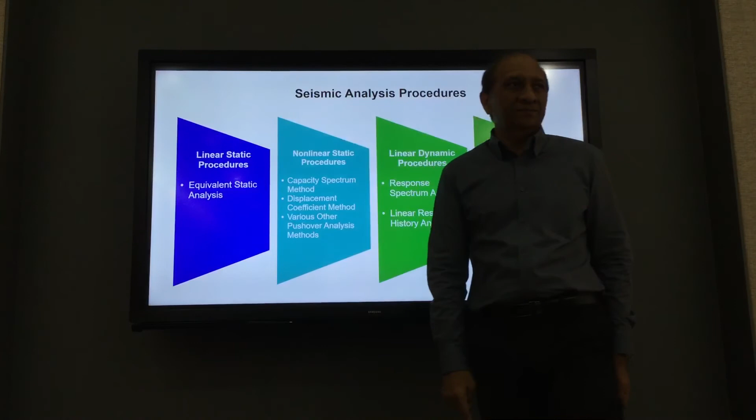First one is linear static procedure, called equivalent static analysis. The building codes just do that. If you follow the building code formula, they will just give you the lowest level of analysis with the most approximate and inaccurate results, especially for tall buildings. Not suitable for tall buildings. So we never do that. Cross - we don't do that. If you want to do that, don't come to this class.

Second one - no, we still do that for some reason. Non-linear static pushover analysis.

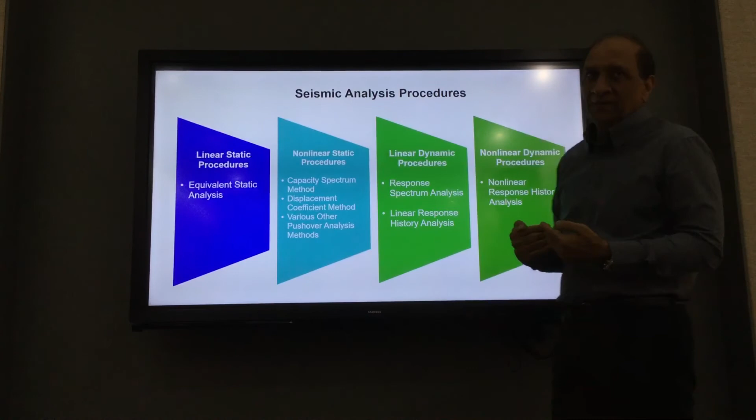This is not dynamic but non-linear. It is still static but non-linear. That means we take the equation and we do not take the mass, acceleration and damping, but we take the non-linearity part. This is very useful analysis for buildings if we want to determine their capacity or pushover curve. And this was very popular at one time. It still is popular for short buildings, not so good for tall buildings. We still do it because it has good knowledge, good information there, and we should try to understand how it works, and we can still do that. So this is quite interesting.

Non-linear static pushover - when we used to teach this a lot in seminars, I used to do so many seminars on pushover analysis 10 years ago. We don't do that much now. We should do that, but we don't do that much.

Then linear dynamic procedures - response spectrum analysis and linear response history analysis. Response spectrum analysis is the most common analysis method that people use when they run ETABS or other programs. But the person who developed this method - I met him last time when I was in the US. He's now 90 years old. It's from 1992, but he's still very active.

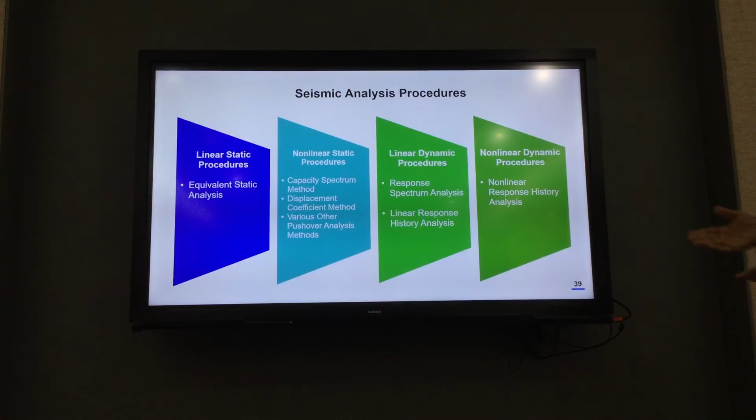And now he writes so much against this method that he proposed, and he said, I regret that I proposed this method at that time because it is not good, and he finds so many faults in it. But at that time when he proposed it, there was no other option. So this has been the most popular method of analysis so far for earthquakes - response spectrum analysis, where you have a response spectrum, as I showed you just now. But Professor Wilson, who proposed this method, is now very against it. And he was telling me, you must stop using that.

And we already listened to his advice. We are not using it much now. We try to use linear response spectrum - instead of that, we use linear response history analysis. And most of the time, we are using nonlinear dynamic procedures, the last one.

The most sophisticated one, so far the best one, or as we say, the most accurate one. So if you use this analysis, this is the best one so far. But it's difficult, time consuming. But most of you, when you do thesis, if you do thesis on the analysis side, you will be using this one, right? But this is only used for tall buildings.

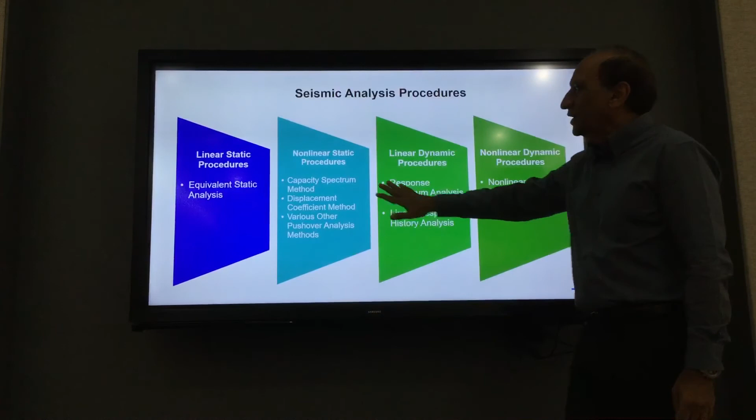Sometimes response spectrum is still used a lot. We still use pushover analysis. In fact, the building that I showed you in the video is taken from pushover analysis - that is a nonlinear static pushover analysis that gave you that nonlinear curve. So it is a good method. But ultimately, this is the one.

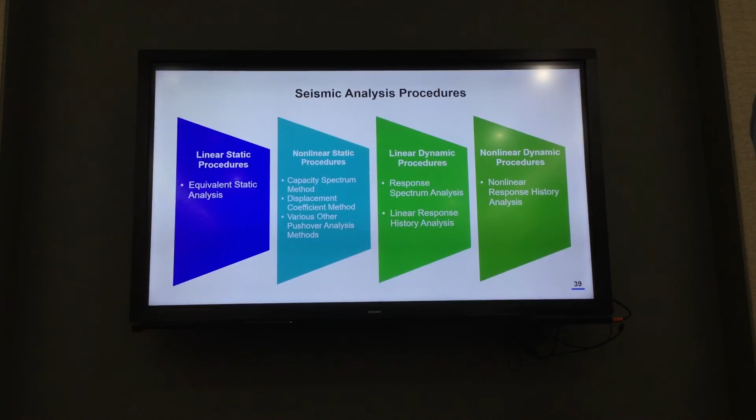Professor Wilson is not in favor of this so much - not that he doesn't know this is the best method, but the problem is that engineers are not familiar. You need too much data, and people can make mistakes. So instead of this, he's thinking to improve this method, and they're working on that - to make this response spectrum analysis better and remove some of the problems that we have in that method, rather than completely removing that method, which is a good approach.

So a lot of our students, your seniors, have done PhDs and master's theses on improving this method to match with this method somehow, right? So it's good research also if you want to work on that area.

So nonlinear dynamic time history analysis - this is the benefits and the disadvantages. So I'm going to stop here for any questions.

So first of all, the advantages are this can be applied to all kinds of structures. The advantages are you can handle all types of loading. Advantages are you can handle non-linearity, you can handle damage, you can handle everything. Disadvantages: it's complex, needs more information, needs tools, needs skills. It takes about, in our experience, 1 or 2 years for people to learn this method to apply correctly. So if you invest about 2 years in this one, then you will be able to use this method.

Response can be sensitive to changes in many things, so you need a lot of understanding. I'll leave this to thesis later.

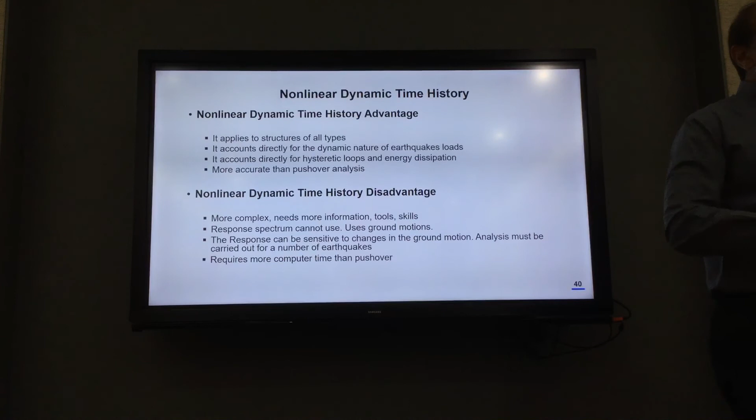Okay, let's stop here. Any questions about what we talked today? What did you get? This is an important lecture, so let's have a quick review of what we understood today, because this is, to me, an important discussion of the lateral response of tall buildings. Start with you, what did you learn?

The important thing is that shear is dominating in the higher mode and bending is dominating in the lower mode, so we have to consider this within earthquake and wind. Excellent, very good, do not forget that.

About the influence of the wind and earthquake effect on the shape, that graph you showed, maximum at the base. Yes, so please remember that graph, it's an important graph. I showed this slide at the Vertical Cities conference also, and a lot of very experienced engineers had a lot of discussion about that.

Only a significant number of modes are useful in modal analysis. Good. The other thing is that for modal analysis, we always have to look for time period and mode shapes. Should always be considered, okay.

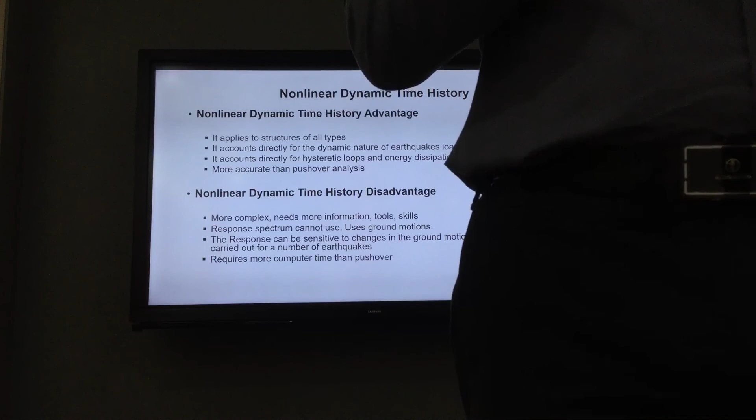The first mode moment for the earthquake, the first mode moment, that contributes much in modal analysis. But I still wonder about how higher mode shear contributes, I mean, we have to consider a lot of modal analysis with shear.

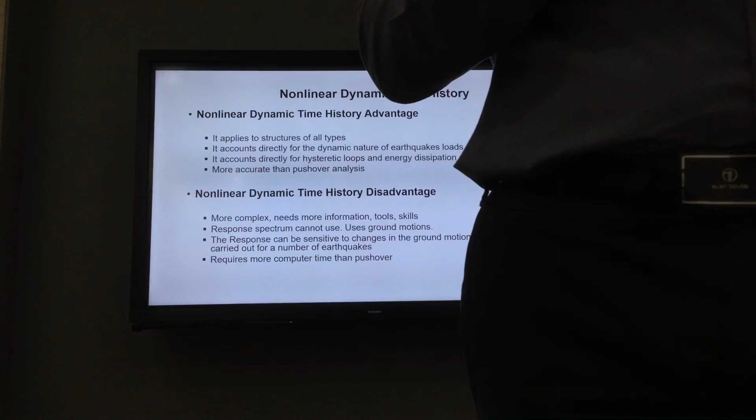Yes, that's a good question. Normally when you do the analysis, you must select several modes to be included. The program will get results from many modes, and then combine the modes using some rule. We cannot add them together because those modes do not occur at the same time, so we normally combine them using different modal combination rules, for example SRSS or CQC. So that combination of modes is important, that's where we combine them.

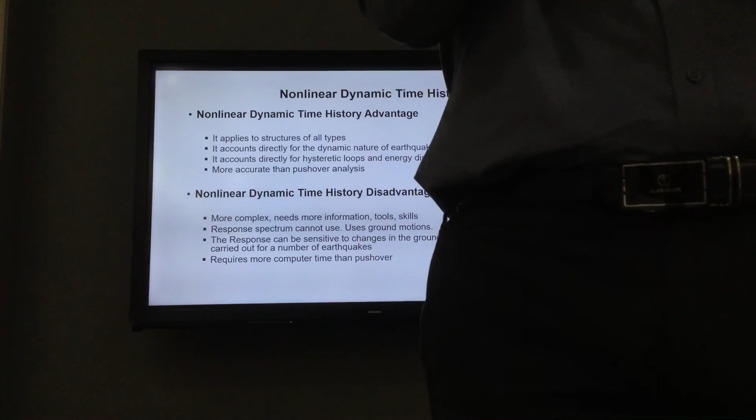But the problem is when you combine them, you lose the individual contribution because we combine them using arbitrary combination rules. That's why it is important to look at each mode separately also. Learning about modal analysis is very important for us to understand the behavior of the building, and we have plenty of modes, but we should focus on the significant ones.

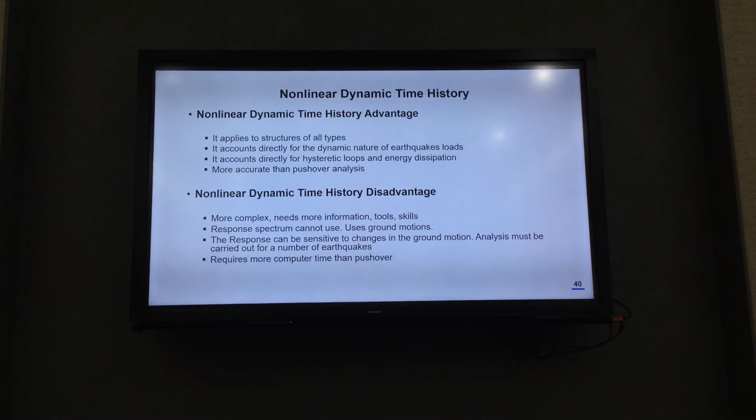Very good. Next one, to reduce the earthquake force, we need to increase the natural period, and then increase or reduce? Increase. And then you mentioned about unsymmetrical and symmetrical structures, that torsion will be in the third mode for symmetrical, right? But you didn't answer the case that a symmetrical structure can have torsion in the first mode. I know I didn't answer that because I want to keep something with me, some secret with me.

Okay, the case is core buildings. When you have a building with a central core that is completely symmetrical, the core has all the stiffness, but outside there is no stiffness. So the building starts to rotate about the core because the core is the center, so there is no torsional stiffness of the building. Before it can bend, it starts to rotate. That means if you have a weak frame on the outside and no walls on the periphery, the building will start to rotate. So a building which has a core wall and flat slab structure will have the first mode as torsion, unless you put some frames on the edge. That means it's weak in torsion because it has no torsional stiffness.

Now you got the answer. Okay, next one. I learned that response spectrum is very important.